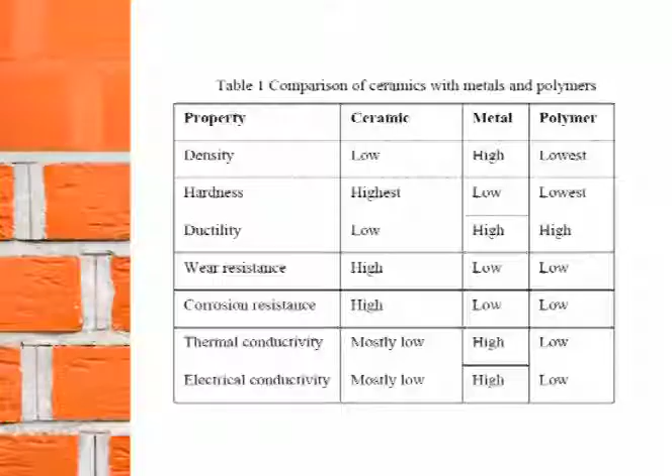This comparison would enable us to justify the application areas of the ceramics.

In terms of the property, the lowest density is of polymer. Then we have ceramic, and then we have the highest density of metal.

In terms of the hardness, the lowest is polymer, then above that we have the metal, and the highest we have the ceramics. Ductility.

The metal and polymer are highly ductile, whereas the ceramic is low in ductility. In terms of wear resistance, the metal and polymer have lower wear resistance, while the ceramic has high wear resistance. The corrosion resistance is the same as the above.

The metal and the polymer have low corrosion resistance as compared to the ceramics. In terms of thermal conductivity and electrical conductivity, the polymers have low thermal and electrical conductivity, then we have the metal which is high.

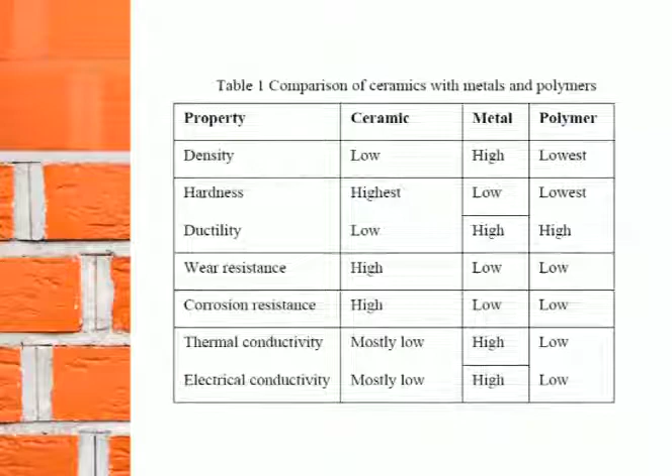And then we have the ceramic, which is mostly low.

The applications: pottery products, sanitary wares, floors and roof tiles, crucibles, linings and other refractories.

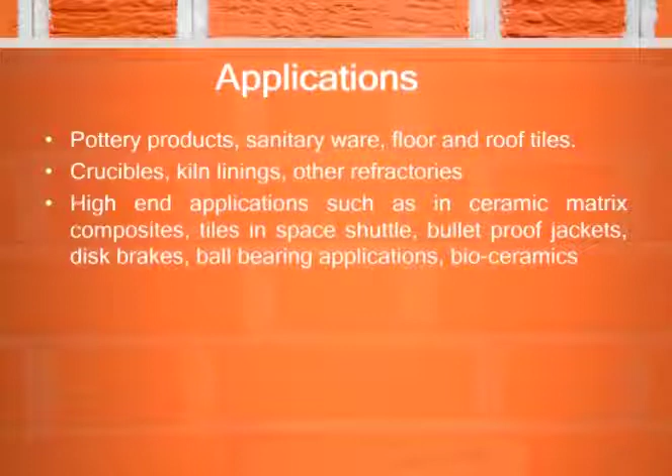High-end applications such as in ceramic matrix composites, tiles in space shuttles, bulletproof jackets, disc brakes, ball bearing applications, and bioceramics.

Let's talk about the classification of ceramic materials.

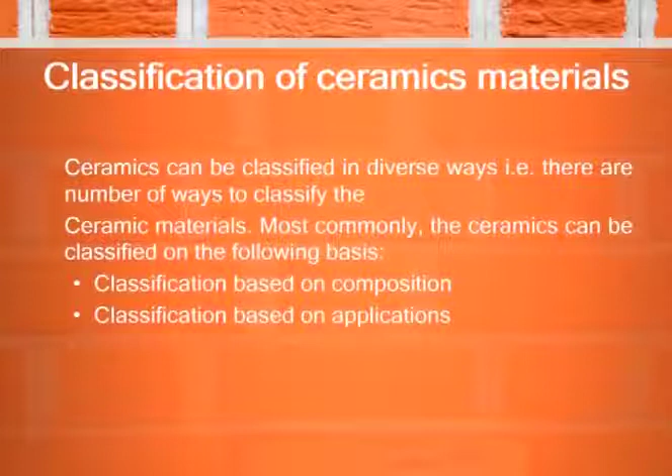The ceramics can be classified in diverse ways. That is, there are a number of ways to classify the ceramic material. Most commonly, the ceramics can be classified on the following basis: classification based on composition and classification based on applications.

The classification of ceramic materials is shown on the screen.

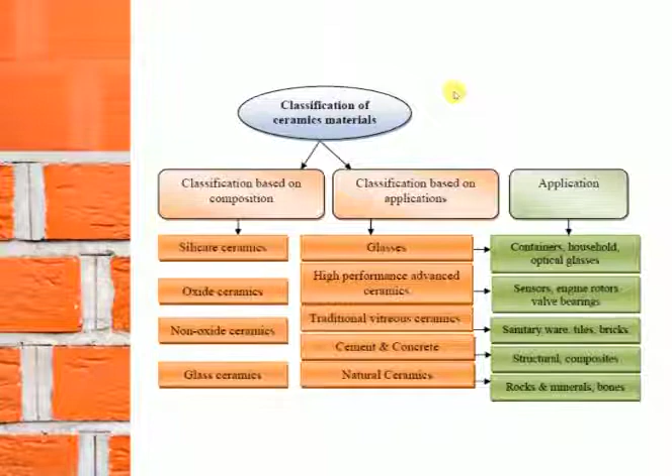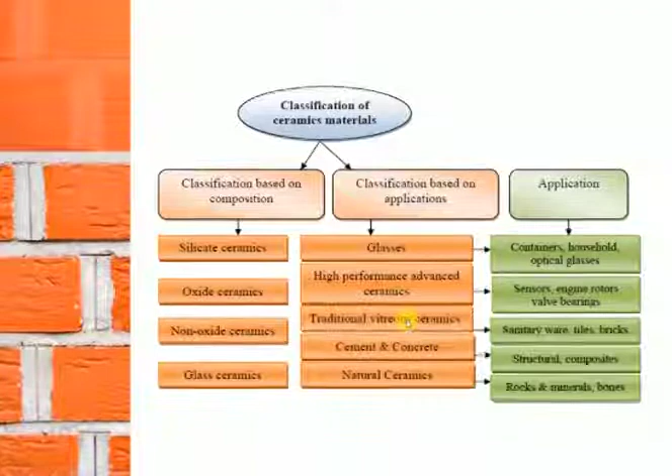In terms of classification based on composition, we have silicate ceramic, oxide ceramic, non-oxide ceramic, and glass ceramics. In terms of application, we have glasses, high performance advanced ceramics, traditional vitreous ceramics, cement and concrete, and natural ceramic.

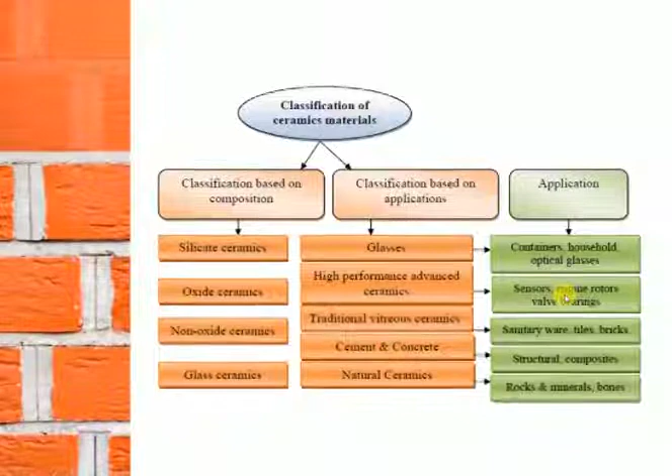In terms of application, if you talk about silicate ceramic, we have glasses, containers, and household optical glasses. For oxide ceramics and high performance advanced ceramics, we have sensors, engine rotors, and valve bearings.

In terms of non-oxide ceramics, we have traditional vitreous ceramics, etc.

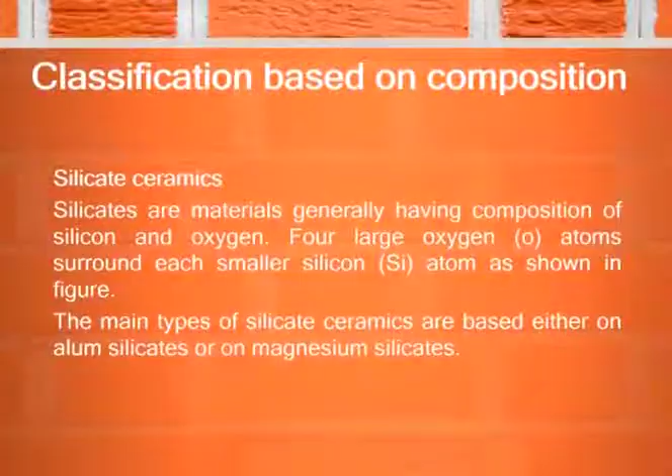The main types of silicate ceramics are based either on alum silicate or magnesium silicate. Like this, we have 1, 2, 3, 4 oxygen components, and this is the silicate.

Out of these two, the former includes clay-based ceramics such as porcelain, earthenware, stoneware, bricks, etc., while the latter consists of talc-based technical ceramics such as steatite, cordierite, and forsterite ceramics.

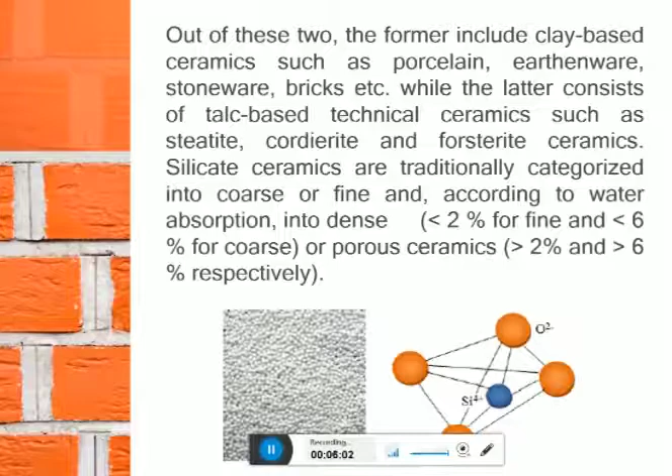Silicate ceramics are traditionally categorized into coarse or fine, and according to water absorption into dense: less than 2% for fine and less than 6% for the coarse.

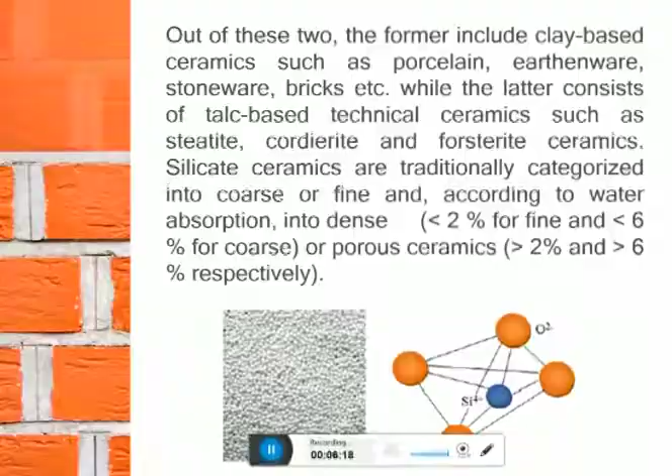Or the porous ceramic is more than 2% and more than 6% respectively.

Classification based on composition also gives us oxide ceramics. The oxide ceramics include alumina, zirconia, silica, aluminum silicate, magnesia, and other metal oxide based materials.

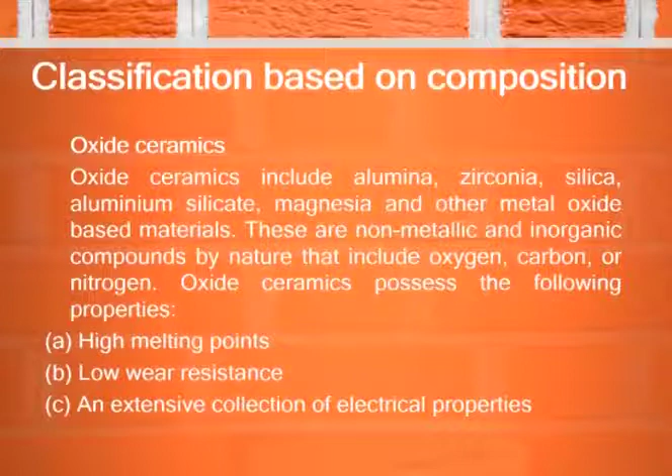These are non-metallic and inorganic compounds by nature that include oxygen, carbon, or nitrogen. Oxide ceramics possess the following properties: high melting points, low wearing resistance, and an extensive collection of electrical properties.

Now let's talk about classification based on composition. These types of ceramics are available with a variety of special features, for example, glazes and protective coating, seal porosity.

Improved water or chemical resistance, and enhanced joining to metal or other materials.

Oxide ceramics are used in a wide range of applications, which includes material and chemical processing, radio frequency and microwave applications, electrical and high voltage power applications, and foundry and metal processing.

Aluminum oxide, Al2O3, is the most important technical oxide ceramic material. This synthetically manufactured material consists of aluminum oxide ranging from 80% to more than 99%.

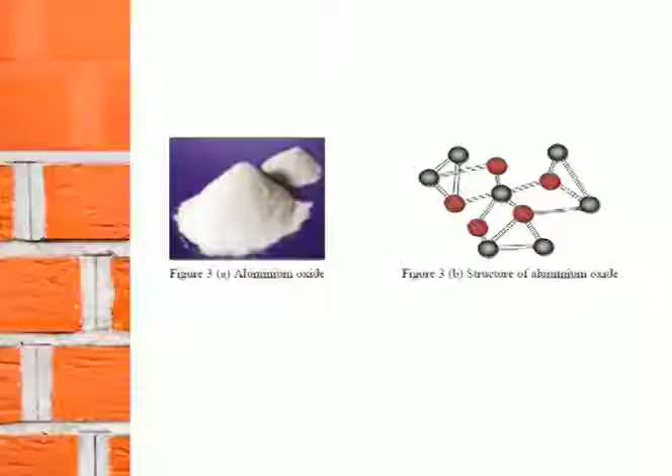You can see over here the aluminum oxide in figure 3a, and in figure 3b we have the structure of the aluminum oxide.

Non-oxide ceramics. The use of non-oxide ceramics has enabled extreme wear and corrosion problems to be overcome, even at high temperature and severe thermal shock conditions.

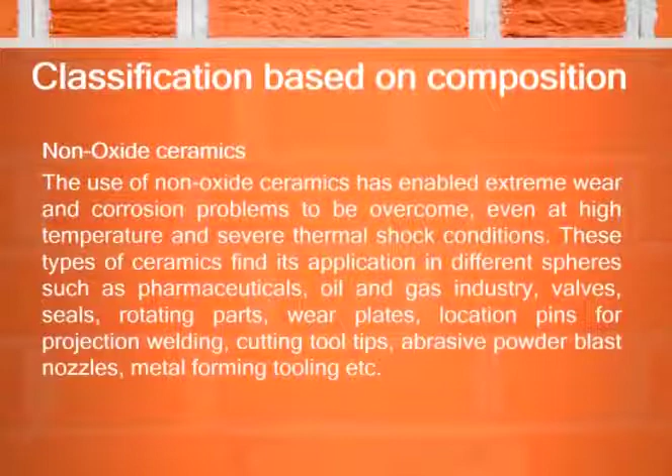These types of ceramics find application in different spheres such as pharmaceuticals, oil and gas industry, valves, seals, rotating parts, wear plates, location pins for projection welding, cutting tool tips, abrasive powder blast nozzles, metal forming, and tooling, etc.

Glass ceramics. These are basically polycrystalline materials manufactured through the controlled crystallization of base glass. The glass ceramic materials share many common characteristics with both glasses and ceramics.

The glass ceramics possess an amorphous phase and more than one crystalline phase.

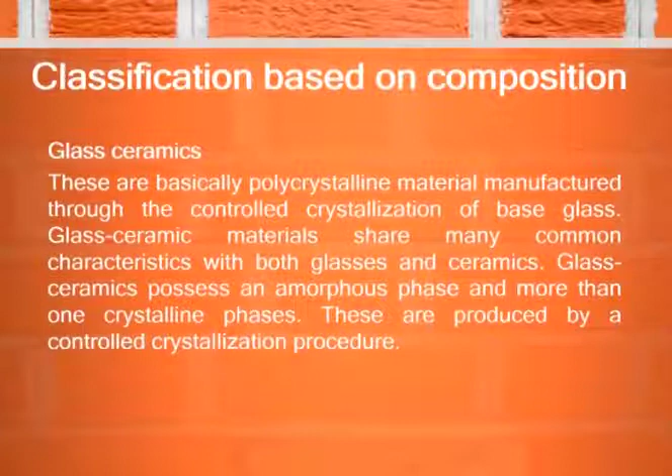These are produced by a controlled crystallization procedure. The glass ceramic holds the processing advantage of glass and has the special characteristics of ceramics.

Glass ceramics yield an array of materials with interesting properties like zero porosity, fluorescence, high strength, toughness, low or even negative thermal expansion capacity, pigmentation, high temperature stability, dielectric, low dielectric constant, machinability, and high chemical durability.

Biocompatibility, superconductivity, isolation capabilities, and high resistivity.

These properties can be altered by controlling composition and by controlled heat treatment of the base glass.

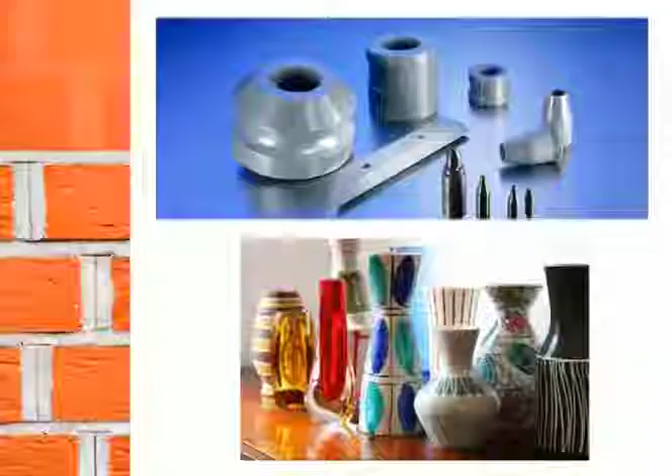You can see on screen some examples of ceramics. Thank you.